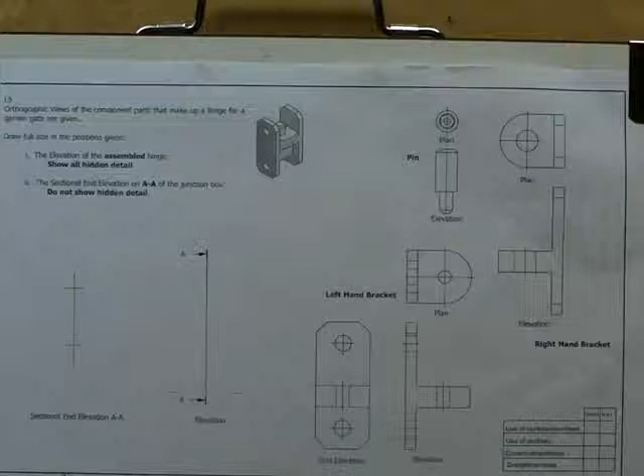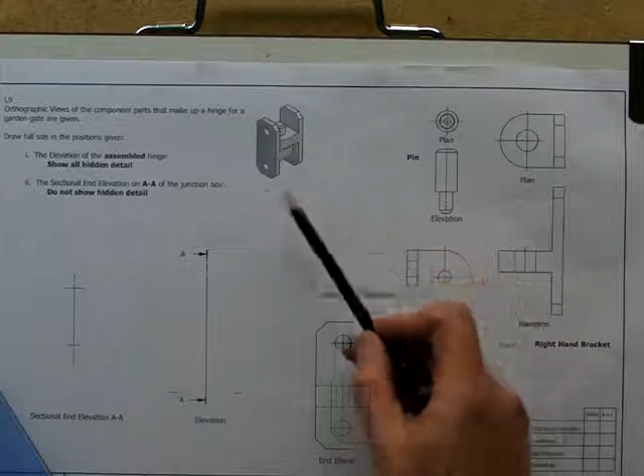This is an assembly drawing, which means that we've got to draw various parts that are outlined here: the pin, the left hand bracket and the right hand bracket, connected together. Now, helpfully, they've included in this drawing a pictorial which shows you how they go together.

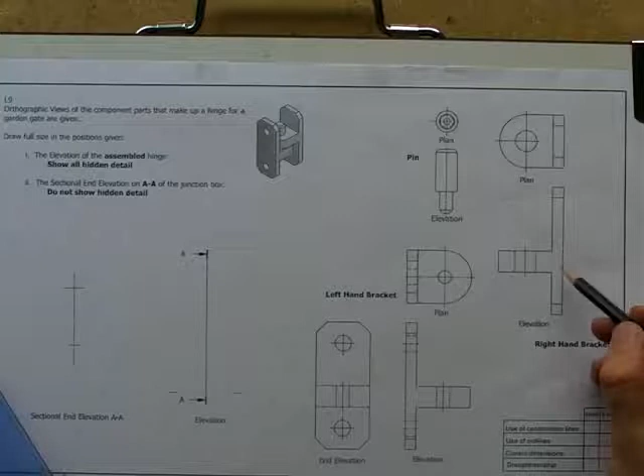Now, you really need to use that pictorial, because one of the things that's slightly misleading in the drawing is that the right hand bracket is shown here upside down. If you like, that's the top and that's the bottom. Okay, so you've got to be a wee bit careful when you're assembling it. But other than that, it's fine.

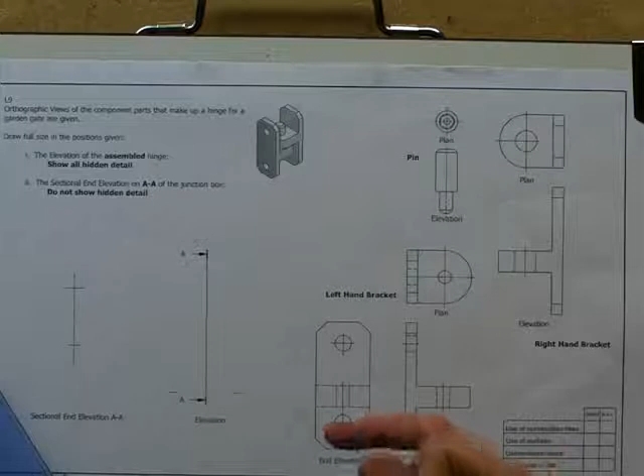I find assembly drawings generally straightforward because you've got all the information and you're not having to kind of derive or make up the information about the drawing. You've got it in front of you. We've got a starting point for you for the elevation here.

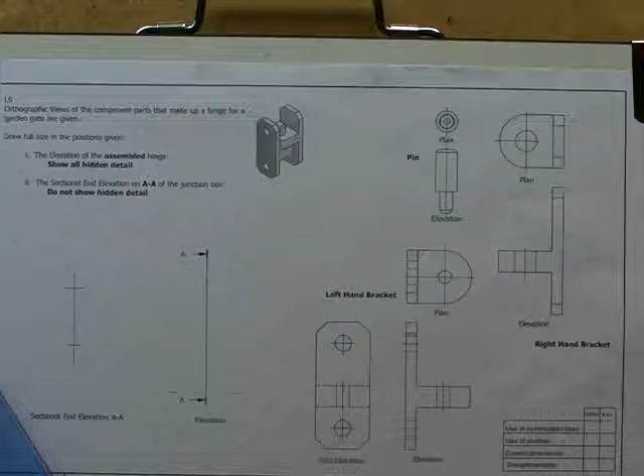So the first thing that I would do is to draw the left hand bracket elevation in place, and then move on to the right hand one, and then we'll draw the pin in place as well. You're always looking for parts that are going to fit together, that are going to sort of fit inside each other. But we'll make our way through the drawing of the elevation right and left first of all, and then we'll work on from there.

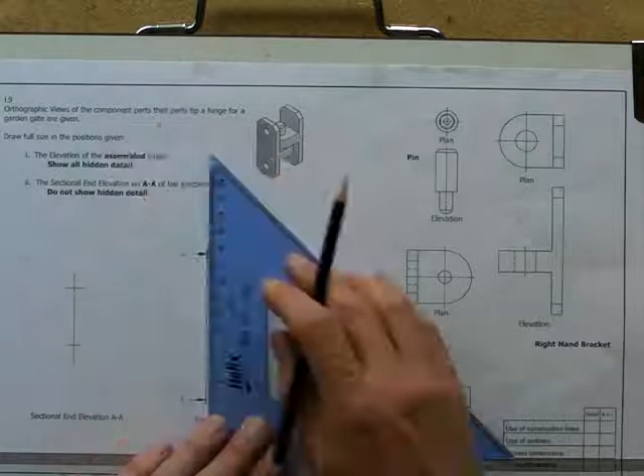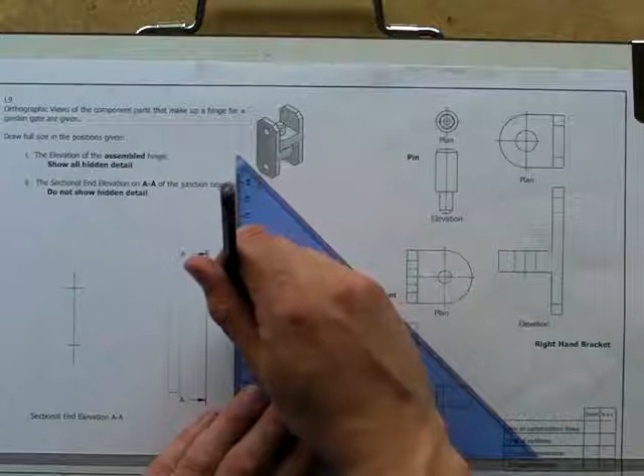So we've got a wee starting point there. So I'm just going to project up from that starting point just now. Okay, and I'll do the same on the other side. Project up from that, and I'll project up from here, and I'll project up from here. Okay, so that's me got my starting points just now. I could actually just project right the way up there. Makes some sense to do that, and then we can shorten parts if we need to.

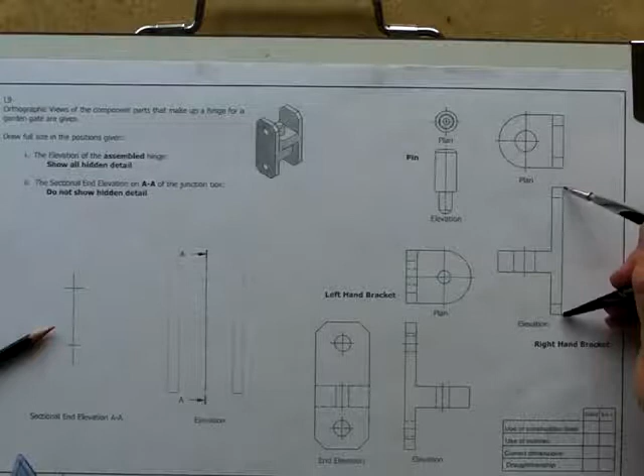Okay, let's get the height. So compass time. Let's get your compass and measure the height. I'm just going to mark on various heights on this. So that's the overall height there. You find that the overall height of the right hand bracket is the same also. So you know, I could do that, or I could just project across.

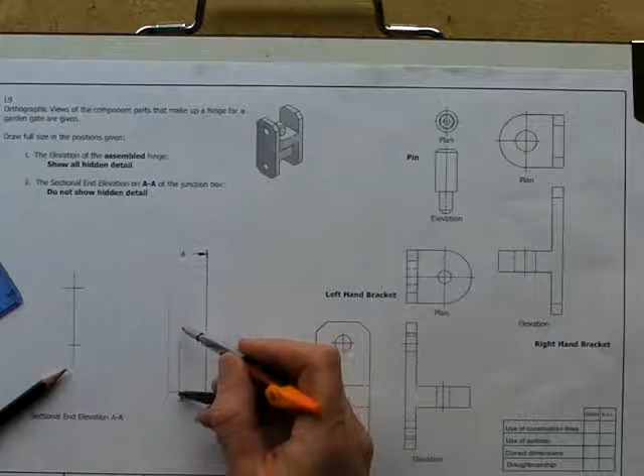I'm also going to measure the position of this part here that sticks out. So that begins there, it ends there, so I'll mark that one there. While I'm at it, I'll mark on the position of the wee chamfer here. Look at the chamfer, which is there. I happen to know that that's the same size on the top, so I'll just mark that there from that point.

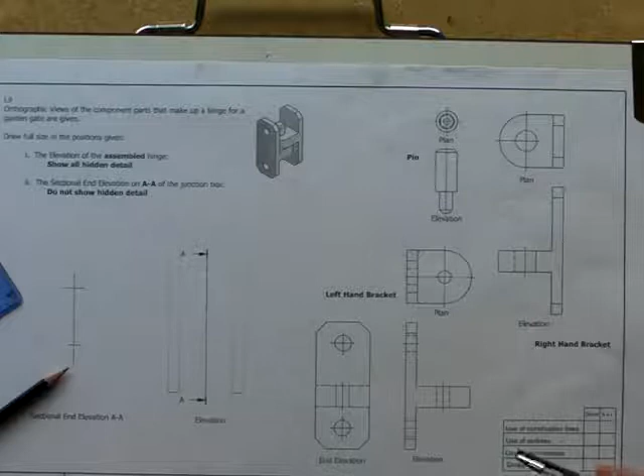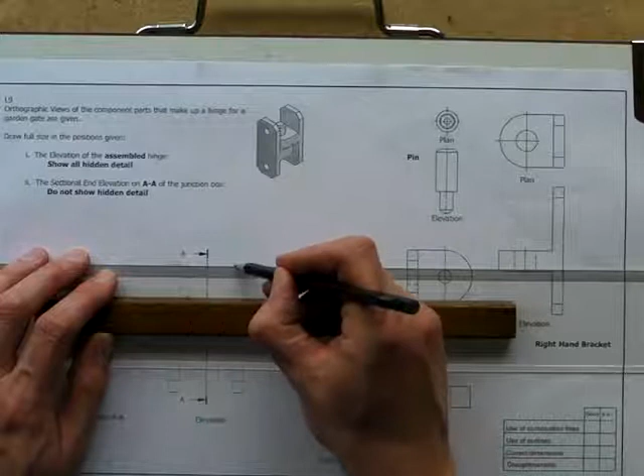Right hand bracket's got similar parts, so there, and if I project across, in fact I've got my wee dot here, it's okay, let me put that here. Right. So I'll go and start and add some detail to that. So we've got the wee chamfer part there, we've got the top there, chamfer there, and there. Okay, and I've got the part that sticks out.

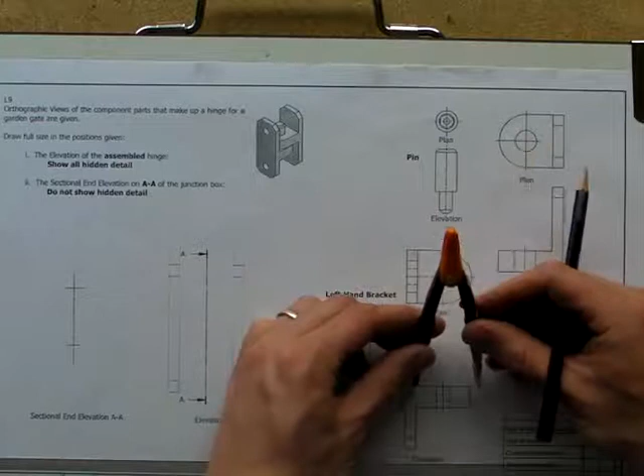And if you look at the part that sticks out and measure it, this is the sort of joining part, if you like. Measure that carefully. You should find that it goes right the way across to the right hand bracket, which it does. So I'm just going to draw a line like that across and across.

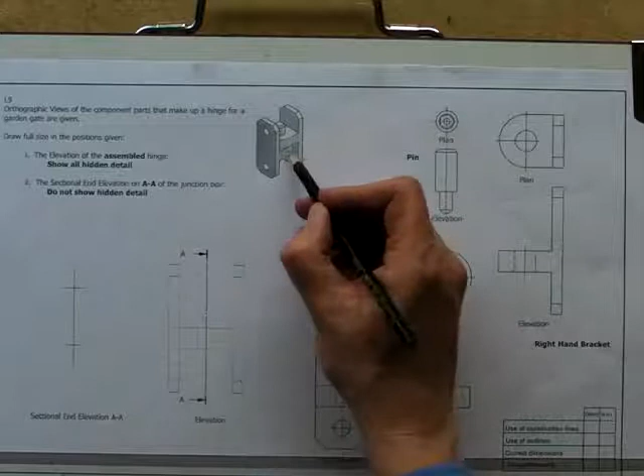Now, the right hand bracket sticks on top. That part there is that part, and the next part is going to go on top. It's the same height, I think, so I'm just going to measure it just to check. Yeah, so measure that, and I'll mark that one there. So that just goes across here like so. Okay, so that's the two brackets coming together.

Right, I'm going to firm in a few lines just so that you can see this clearly just now. I always think it helps just to do this sort of thing as you go along, just to give you confidence that the drawing's coming together.

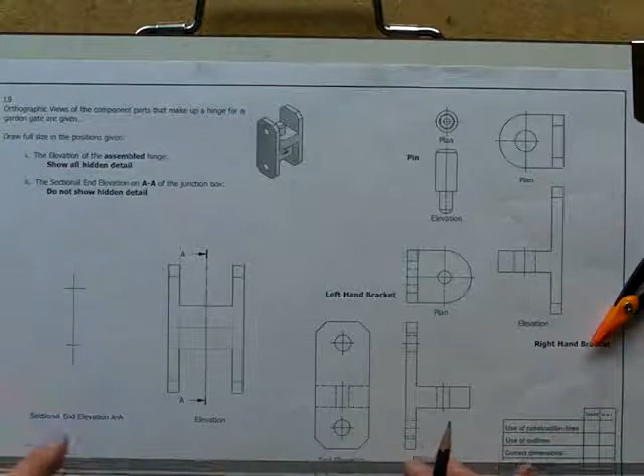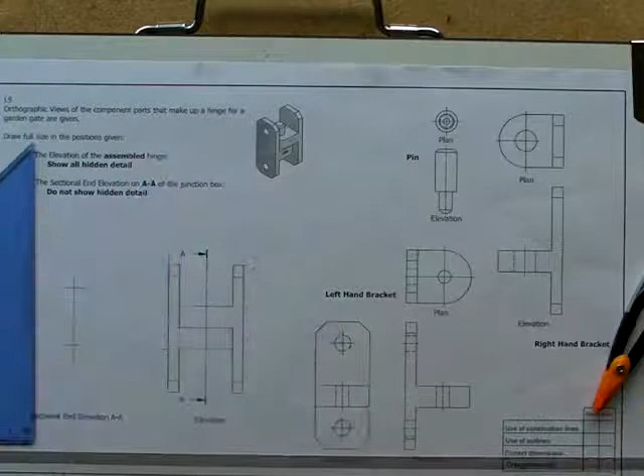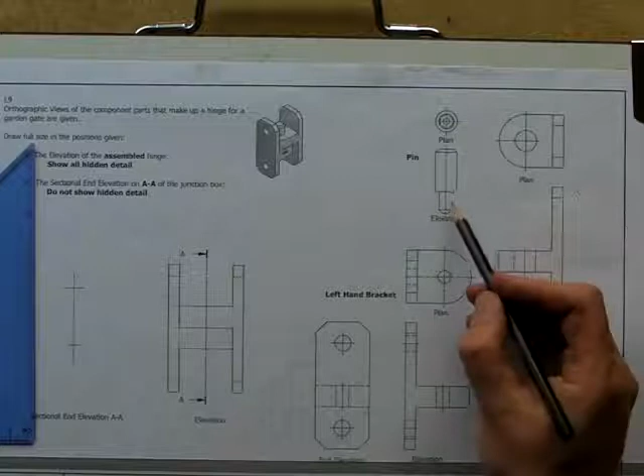Okay, so that's the two parts sort of coming together. Right, now we need to consider the holes in the middle. You can see that on the left hand bracket you've got a narrow diameter hole, and on the right hand bracket you've got a wide diameter hole. Now what goes into them is the pin. So it's quite obvious, I think, that the small part of the pin goes into the left hand bracket and the fatter part of the pin goes into the right hand bracket.

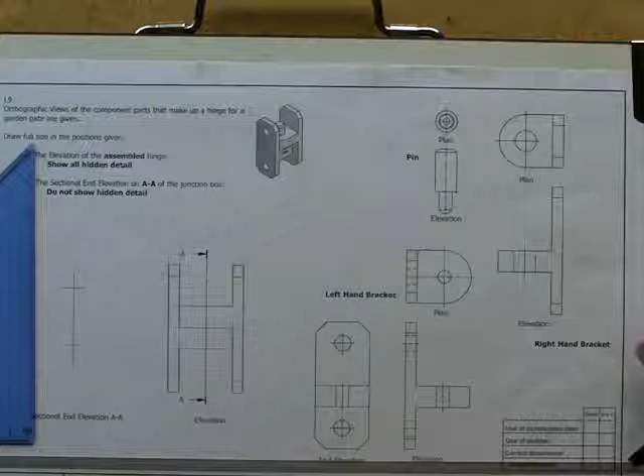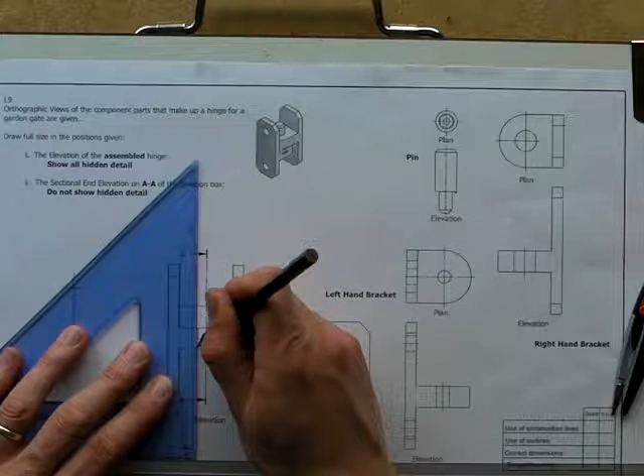And obviously, as you can see in the pictorial, some of it sticks out the top. This part here must rest on this part here because it can't go any further because the hole's smaller. So let's get some information about the size of the hole. Just measure it from the centre line here, and we'll mark it on here. Now, what we're producing here is a bit of hidden detail, so we're just going to do a dashed line here. And it says here show all hidden details, so that's exactly what we're going to do. So again, hidden detail here.

Okay, and above that you've got the right hand bracket, so we'll measure the size of the hole here. And we'll mark it on here, and here. Okay, again we'll just mark in the hidden detail of that. So this is where the pin's going to go. So we're not going to show any more detail in this part, but we're going to have to show some detail about the pin itself.

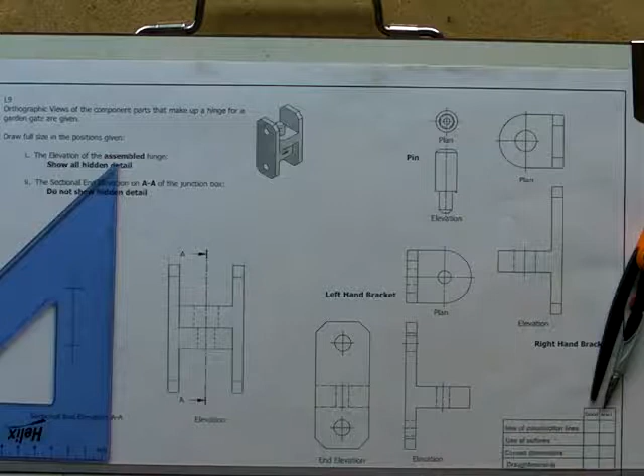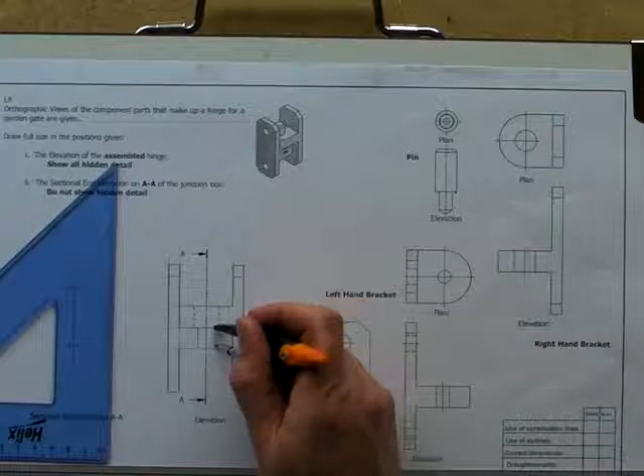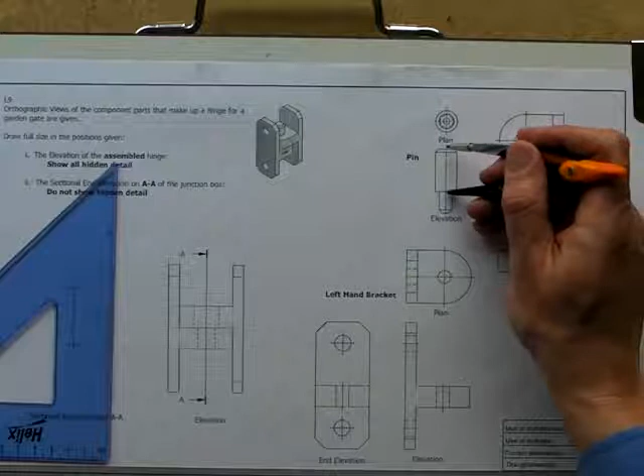Now, if you look at the pin itself and you measure this distance between here and here, you can see that that actually comes to just below the bottom. If you measure the overall length, it comes right to the bottom. So in actual fact, we're not going to see any detail of the bottom of the pin at all. The top of the pin, on the other hand, measure it right to the top, is going to appear at the top of the drawing.

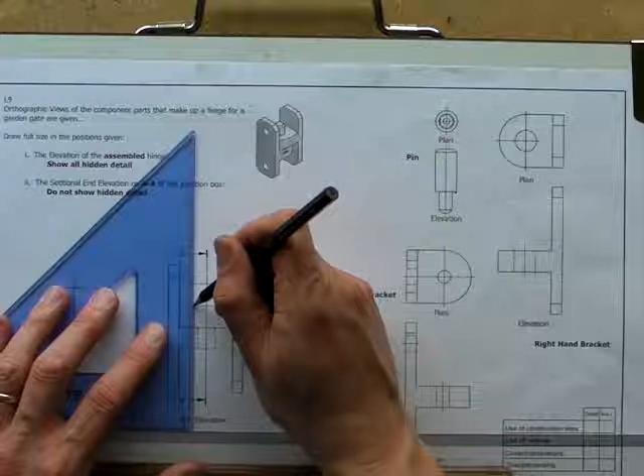So I'm just going to line in, this is a wee construction line just now, that's the very top, okay, and draw up to there just now, again just doing light construction lines just now. I've got this wee chamfer on the top. It's very small height, you can almost just judge it by eye. I'm just going to use my compass to measure. So it comes down to about there. I'll just draw in a line across there.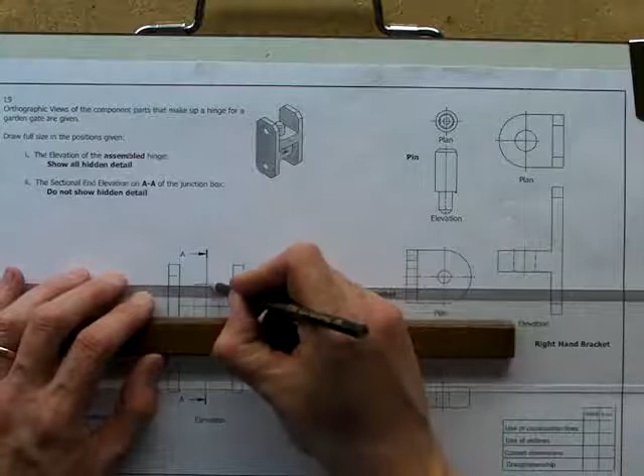Now it is a chamfer, and if you put your 45 set square against it, you can see it's actually 45 degrees. So all I really need to do is get the set square in here and draw a wee chamfer here. Here, and then just firm in the top, like so, firm in that line, firm in that line.

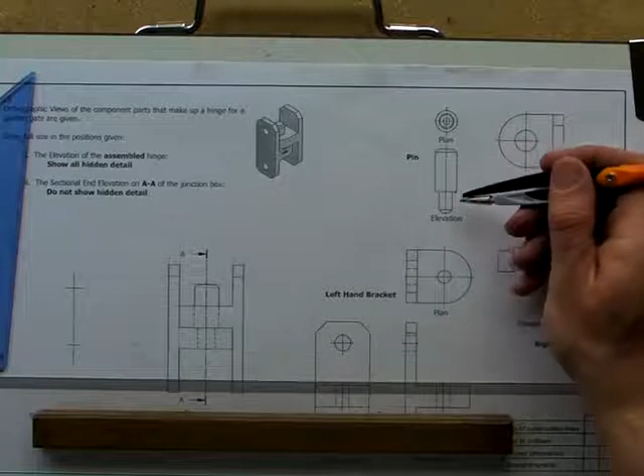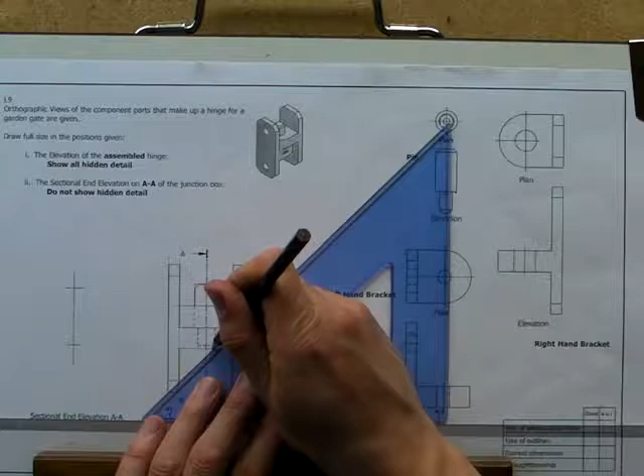Now, it does say show all hidden detail, so there is some hidden detail about the pin at the bottom. I happen to know it's the same size here, so I'm just going to mark a wee point there. Draw that across. Now this is going to be hidden detail, so it's going to be dash, dash, dash, dash, and then at 45 degrees there's a wee bit of the pin there. Just firm in the bottom line there, and that is basically that.

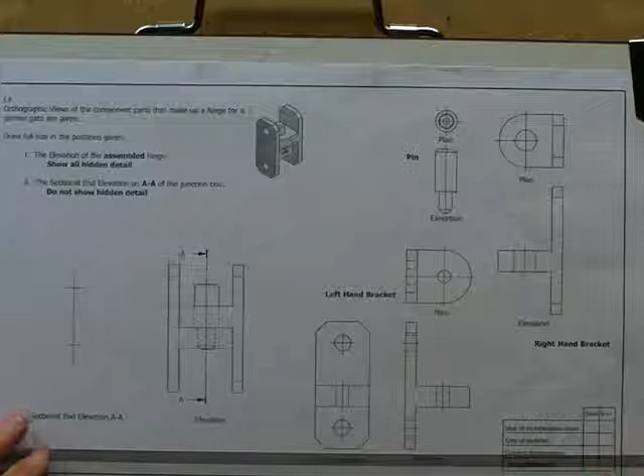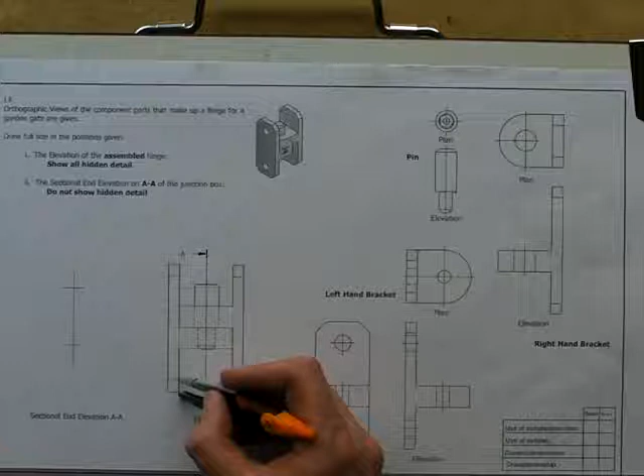I'll just check I haven't missed anything. Oh, I have. Of course I have. I've missed the holes here, because there's holes in this bracket, so we need to include them. So we better get information about them. So the position from the bottom is, let's get this precisely, there. And the top of it is there,

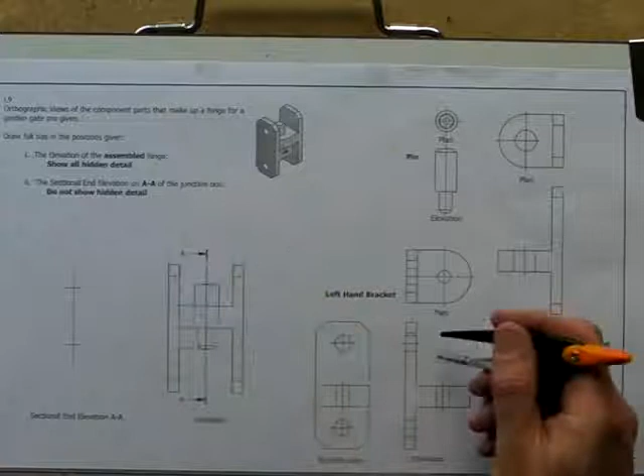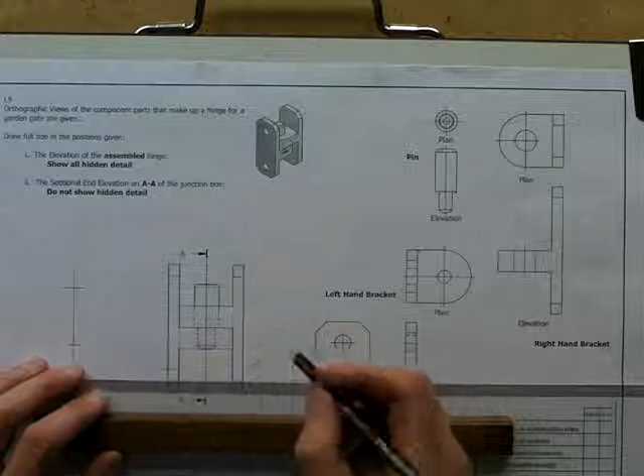and the centre line is there. So the centre line's at the top, it's in the same position there. So just transfer this information over. Centre line first, so long, short, dash, dash, dash for the holes, dash, dash, dash for the holes, centre line, long, short, dash, dash, dash for hidden detail. Okay, so that's the elevation complete, showing all hidden detail.